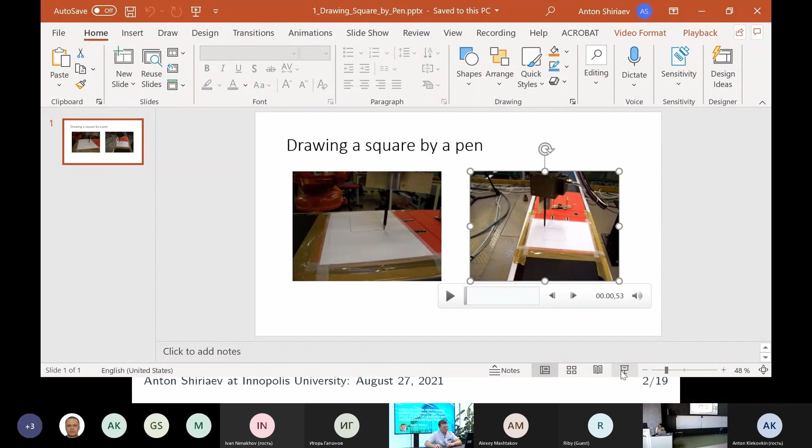I hope you can see my screen, and you will see a movie now, where the robot is expected to perform. Can you see the movie? Yes, everything is okay.

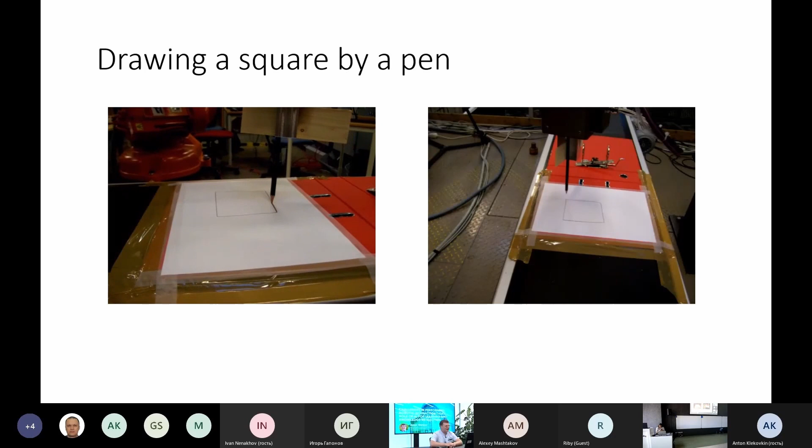Okay, so you see, what is the task? The robot has a pen in its gripping device, and it needs to make a square, and the movie on the right shows that it's feasible. So it means that it's not really a very hard job. However, there are some intriguing parts in the development of that machinery. And if I repeat the same task without specific developments behind this, let's say, manipulation or drawing, and use the standard software of, let's say, this ABB robot, then we will see that a very similar operation becomes a bit hard. So, roughly speaking, the robot using standard software will not be able to perform such a movement immediately.

So even though the task could be easily done by a kid, for quite an advanced and expensive robot it becomes a challenge. So I can repeat it again. And what we see, as a description: the robot has a pen, and the pen, of course, is in contact with the surface, and we can assume that there is a point of contact between the pen and the surface, and suddenly some physics becomes important and drives the pen out, even though, of course, the control of the robot doesn't know what happens with the pen. So in some sense, the behaviors shown on the left and right are done if we assume that the robot has no eye, for example. So it's like feeling just by encoders and possibly a force-torque sensor for the end effector.

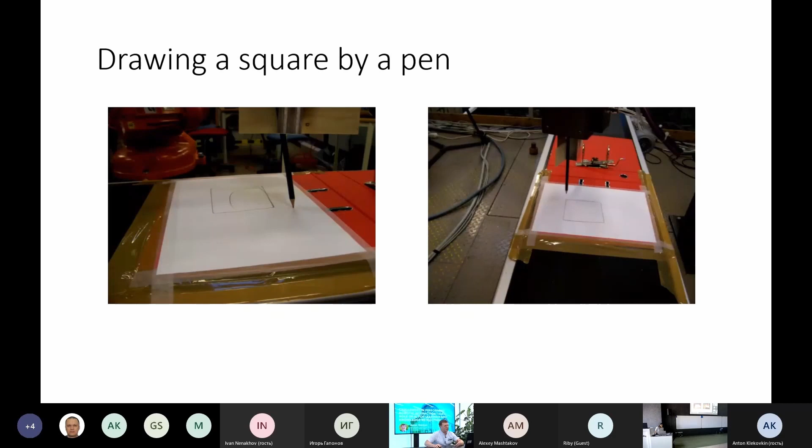Okay, I'm trying to come back to the slides. And this was a motivating example to understand what interaction tasks really are. So we need to perform certain behavior by a robot which will be in contact with the environment. Let's see, okay, just a minute. I need to switch to the slides.

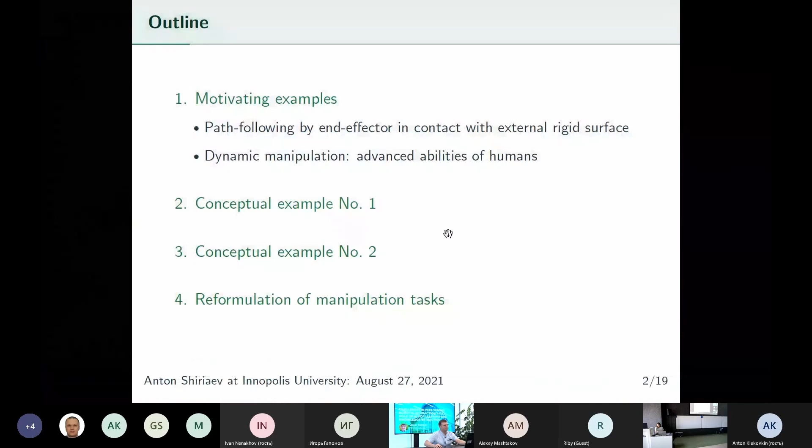Yep. And I will come now to two examples, which I call motivating examples, conceptual examples, which show what could be, let's say, the cutting edge of development in the topic and what kind of challenges appear. And we'll start with the simplest example. You could imagine that we have, let's say, a brick which should slide on a table, and we have another device which we can actuate by some force, move it towards the brick, and we would like to, let's say, touch it and move it. Clearly, in this situation, we have a very similar hypothetical experiment compared to what we have seen in the movie, but the task is a bit different. We would like to move the brick a certain distance, for example, 20 centimeters to the right.

There is plenty of physics involved in that development, and specifically I don't like to discuss in detail contact conditions between this moving stick and the brick I'm going to move. But I will come with simplified dynamics describing the behavior of these two bodies. So assume that they have only one variable to capture their status.

There are also various types of features which I don't like to see, like deformation. Clearly, in the experiment we've seen in a movie, the pen moving on paper which also has some rubber cover below. So there will be certain deformations, and maybe one of those effects really diverts the pen from the path it should go. But anyway, I just try to illustrate here what kind of physics behind might be important.

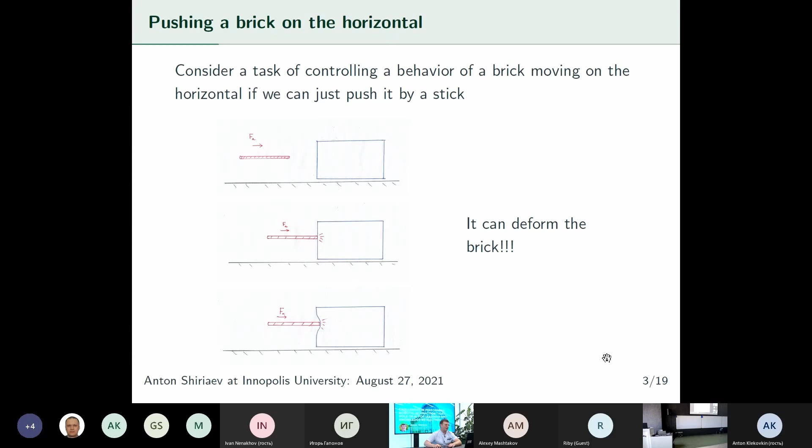In one set of experiments, we did it successfully. In another set of experiments, we deviate from the path immediately. What kind of physics do you need to know to make such an experiment?

Of course, we start with Newton's law. So we assume that we have some object we start to move, which is in red here, and its status is x. We apply external force Fa. Then the dynamics of this object will be mass times acceleration equal to all forces applied, and we assume there is some friction.

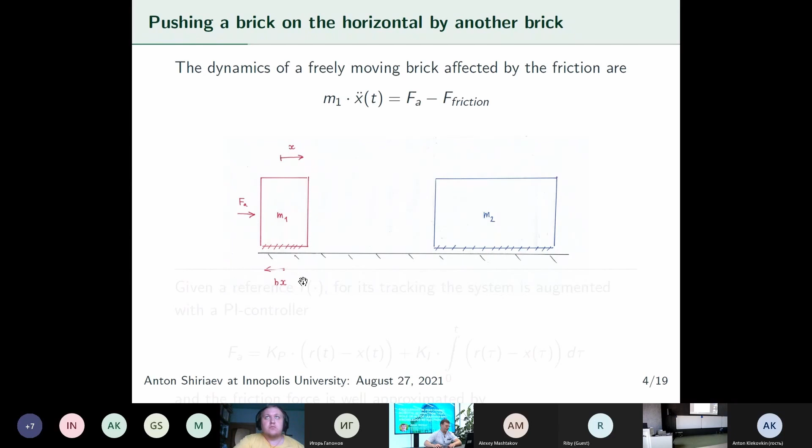We assume that it's linear friction in velocity. And we apply a very standard controller to move this object, let's say a PI controller, where we have a reference R of t, and the first term is proportional, and then the integral part of that feedback. We'd like to make our reference as simple as possible, just constant. Nothing specific important here.

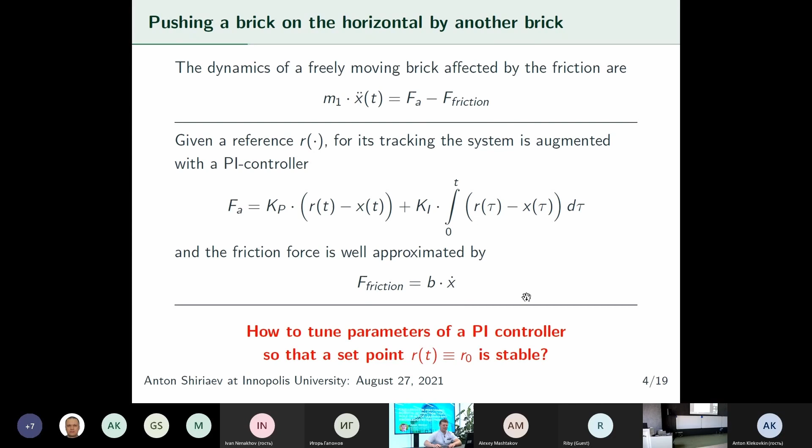If I use such feedback and assume that friction is, as I said, just viscous, depending on the velocity of x, which is the position of the stick I'm going to move, then I get the closed loop dynamics written like that. Clearly, we can think about what kind of parameters Kp, Ki should be assigned so that such a system is stable, meaning our stick will bring its end to the desired position r0.

To do that, we do simple mathematics. For example, I do a Laplace transform of that differential equation and get an equation of third order, where parameters M1, B, Kp, and Ki are now constants.

We know from Routh-Hurwitz conditions that stability of that differential equation is related to the real parts of the eigenvalues of that third order polynomial, and eventually the conditions for that particular polynomial are the following: the coefficients should have the same sign, and since mass is positive, friction B should be positive, Kp and Ki should be positive to be stable, and the product between M1 and Ki should be smaller than the product between B and Kp. This is very basic first year class in control systems.

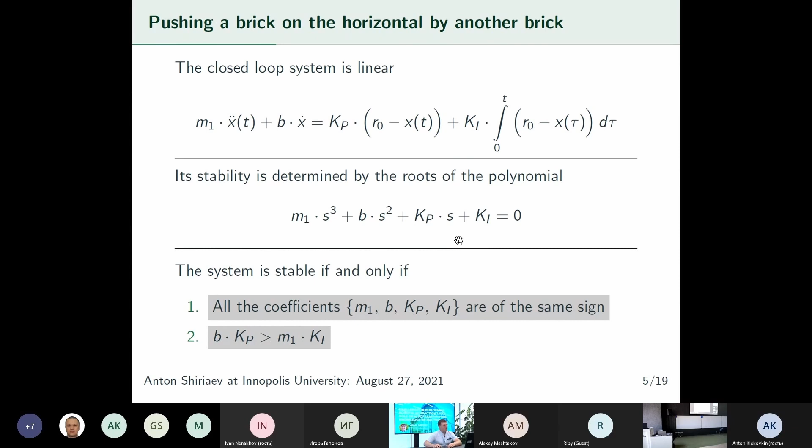However, we will immediately see something which is not typically taught in control classes. What we expect is that at some point the stick we move will touch the brick we are going to move to the particular position. This is our main object. And something should change in the dynamics of our system.

Of course, this object has a certain mass M2. What will be the new dynamics? It will be the same as the previous one, however, we'll have some type of parasitic term related to the additional mass M2 in our system. Roughly speaking, I assume that we have the same variable parameterizing the status, so the difference between the position of this brick and the stick will be just constant, and differentiating, we will get zero twice.

So again, what is written here is Newton's law. If the total system has mass M1 plus M2, but I intentionally move this additional component to the right to see that we have the previous equation plus some perturbation of that equation.

Okay, now let's try to see the status of that system, how it can be stable or unstable. Stability for that system is now changed. Since we have a new parameter M2, which is part of the total mass of the system, the conditions for stability are written as the inequality here: we have a product of B and Kp, compared against a product involving this changed mass. Clearly, we design our Kp and Ki, the parameters of our controller, in a way that guarantees this inequality.

However, it might happen that eventually this property no longer holds. And if I don't know exactly the mass M2, what will happen immediately whenever I touch it, I will get exponential instability. So it's a very strange situation that I design my controller following very basic rules in control theory or in robotics.

Use PI control, typically used for very simplistic, linear systems, and immediately I get some type of black and white results, some type of very hybrid nature. Whenever my stick contacts the big wall, let's say the brick I'm going to move, my controller will result in instability, so the closed loop system will be chattering. Whenever I detach it and come back, then whenever I touch it again, I should come to the regime which will be unstable. And surprisingly, instability will be exponential as well.

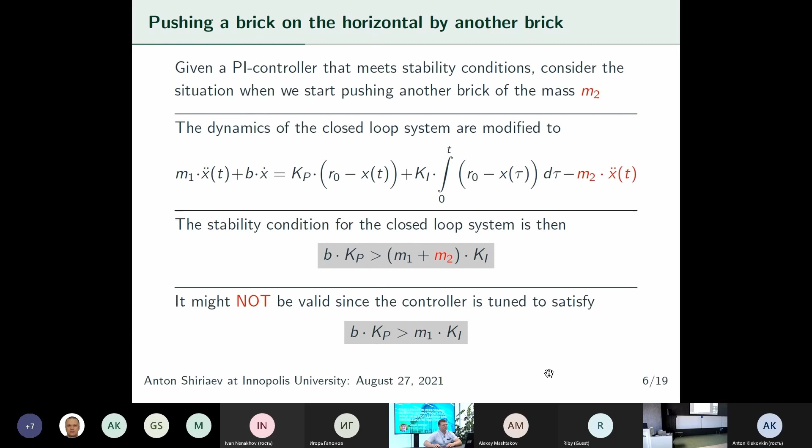Okay, but let's come to some type of mathematics to understand what we could do with that example and how we could handle the choices of parameters of the controller, if we can, such that the system will be in normal condition all the time - not only in the case of free space motion, but also when we are in contact.

And I rewrite the system introducing this additional variable, let's say E, in a format such that it's again an equation of third order - exactly the equation we get after the Laplace transform of this characteristic polynomial. And the right hand side of the equation is either 0 if we have no contact, or this F, this additional force which appears due to the mass of the brick we are going to move.

And I would like to see a bit more than just a mass - it could be another force, it could be some spring effect, it could be more complicated, let's say distributed contact or any other type of physics which might happen there.

But in the case of additional mass, yes. What I forgot to say is that we need to have a picture of what really happens in that example. So we have a plant, let's say the dynamics of our rod, which is going to touch a brick. We design a controller to move it in space, and this is now our closed loop system. So we cannot change anything more.

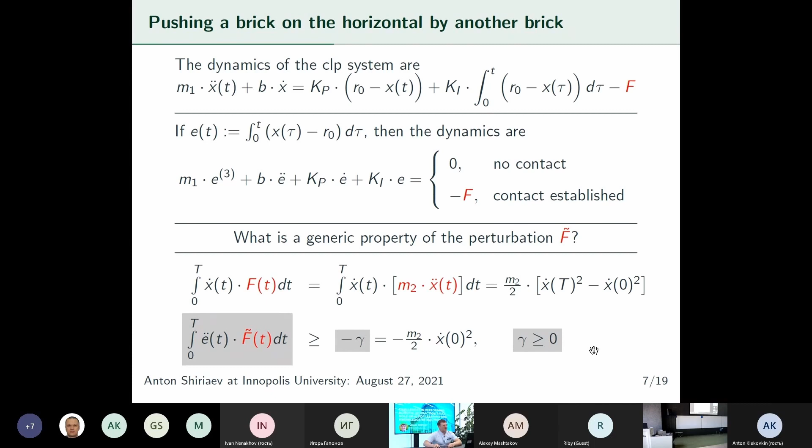And why is this interesting? It's because I would like to make a state space representation of those dynamics to see that the example I'm trying to treat can be put into a more generic format, which is already applied to a much bigger class of systems. So we have a dynamical system, which is linear, originally designed as a stable one - this is, let's say, matrix A of the closed loop system. Then we have a perturbation which comes into a certain channel, and we have a certain function F tilde, which represents our environment, or the presence or absence of contact in this particular example, but in general could be some type of other environmental force.

And what we know about that solution of that linear system and that function f tilde, this is exactly what I said, that I would like to derive this expression like scalar e double dot times f tilde. I rewrite it as, let's say, output of our system, which is now just last component times x, where x is the state of our system.

And it's bigger than minus gamma, where this is what we have seen in the last slide. And this is what I rewrite in more generic form, and then make transposition of that. And I call this internal part of that integral as sigma. This is a quadratic form.

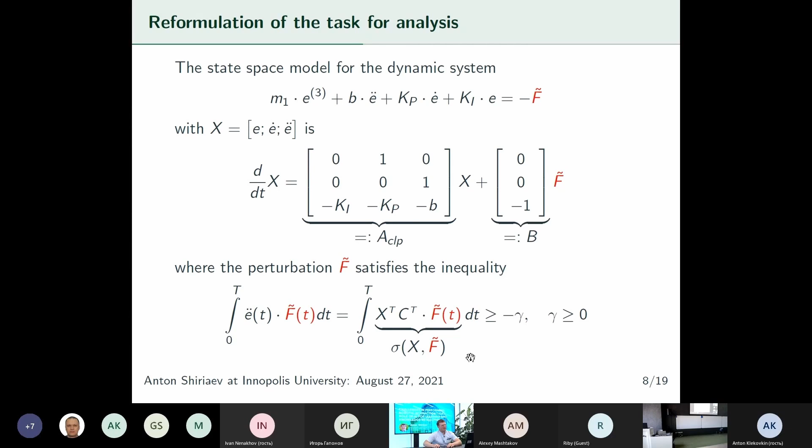A bit further generalization, I would like to see eventually our example in such format that we have a differential equation written in vectorial format when we have a linear stable dynamical system with perturbation, when we have nonlinearity, which comes through this column B into the dynamics of our system, where nonlinearity is characterized by this integral relation, that integral of this quadratic form sigma, which in general, in our case, is just cross product between certain g and x and f tilde, but in general, it could be more generic.

So you see, we would like to represent our closed loop system with perturbation in the format which we can use for analysis. The task now is to understand under what conditions the behavior of that system, of course without perturbation, we know the system is stable and everything goes as we wish, as we designed the controller, it's okay. But whenever perturbation shows up and is bounded and satisfies this integral, typically called an integral quadratic constraint, the solution will still be nearby the original behavior.

This is so-called BIBO stability, bounded input, bounded output stability. This is the simplest stability you could expect, that you cannot guarantee any asymptotic, any orbital, or whatever type of stability, just to stay nearby the original behavior whenever the force is absent. But whenever it's present, we're still nearby the nominal behavior.

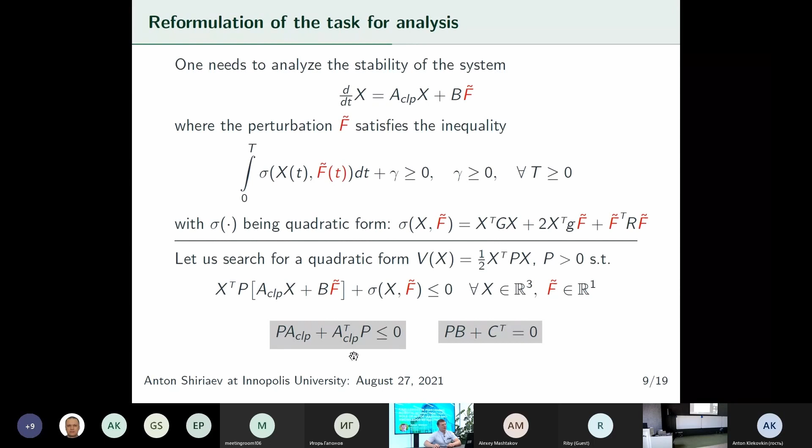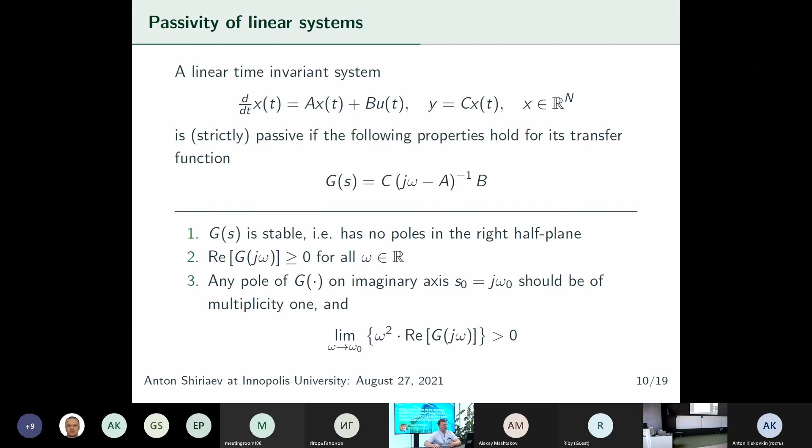I think this is something very standard, but I would like to emphasize that we come immediately from the example to a property which is a very important and basic result in control theory: for our closed loop system to be BIBO stable, both in free space, free movement, and in the interaction task, the transfer function of our system should satisfy this property. And it will immediately guarantee that there exists a Lyapunov function which guarantees this BIBO stability.

Okay, let's come back to our PI controller. Is it possible to check how to tune KP, KI for this case? So the PI controller in Laplace variables is written as follows. And if I check now the transfer function from velocity we have in our system to the force, that's exactly what we need to compute. We get the following expression here.

The interesting thing, not standard in control theory, is that this transfer function will not be proper or strictly proper. You see, we have this term here, which basically means that it's impossible to realize this transfer function. But again, this is not for control design. It's just for analysis of our system in front of various perturbations. And we need to see to what extent this transfer function could correspond to a stable, or passive, dynamical system from this input to that output.

As I said, we need to check that these two properties hold. And it's clearly seen that we have a term here which has multiplicity 2. It means that whenever we have an integral part in the control design, we cannot guarantee any passivity of that dynamical system. And it means that, in our example, there is always a certain brick of big mass such that we will get destabilized behavior, even if we tuned well the free space movement of the stick, when moving a brick using only PI control. So this is an interesting result showing a structural property of the system.

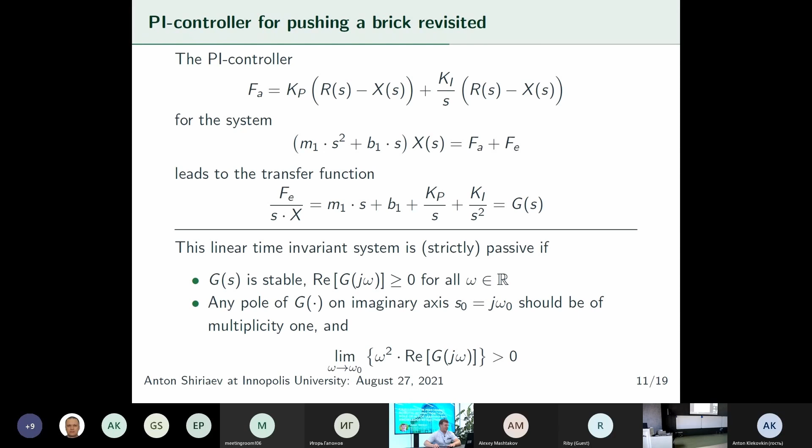So desired position R0. Let's come to the second conceptual example, which allows us to show that the arguments we have here can be extended, but under certain restrictions. Suppose that I have a mechanical system, and it's a fully actuated mechanical system with, let's say, degrees of freedom Q1, Q2, ..., Qn, and let's say it's of so-called natural or simple form; then I have kinetic minus potential energy, the Lagrangian of that system.

And what is well known is that this sum of kinetic and potential energy becomes the total energy of the system, because the system is time invariant. And if I differentiate this function along solutions of that system, I will automatically obtain this passivity relation from input to output. So in the previous example, we tried to search for properties for our closed loop system whenever we have such an input-output passivity relation. Here, for a mechanical system, it's guaranteed; it's given to us.

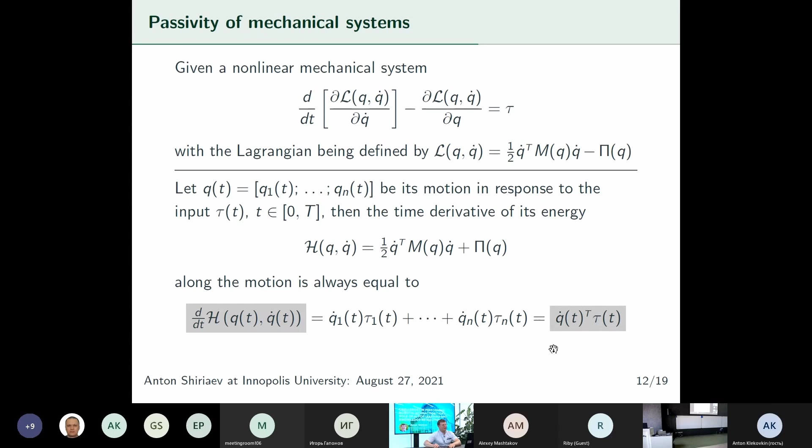Okay, this immediately leads to various, let's say, naive but very powerful arguments. Since a feedback interconnection of passive systems is stable, which is what we tried to implicitly use in the previous example, and since our external object or environment is passive, which we also tried to use in the previous example, the integral of acceleration of x times m2 was exactly the way to verify this property, then we can think about the following control design steps.

Okay, so I have a certain plant, and I would like to design a controller. Of course, the plant in my case is some mechanical system, it's a robot. And I design the controller such that the closed loop system will still be mechanical. In the previous example, with the PI controller, we have a dynamical controller which will have an odd number of states, so it cannot be mechanical in any way. So here I would like to have the structural assumption that the controller will make this closed loop system mechanical, and then I try to exploit this fact for understanding what could be the interaction of that closed loop system with the environment.

If I am able to make this system mechanical, I will have a certain storage function, or internal energy, of that closed loop system, and the environment is assumed to be, again, passive, so the interaction of these two systems will be BIBO stable automatically. And the Lyapunov function shows up for that immediately. And this will be valid for any reference which I can assign, because now it's not about a linear system and stabilization of a particular equilibrium. No, it's now a generic fact. If it's possible, it will be valid for any reference I can choose.

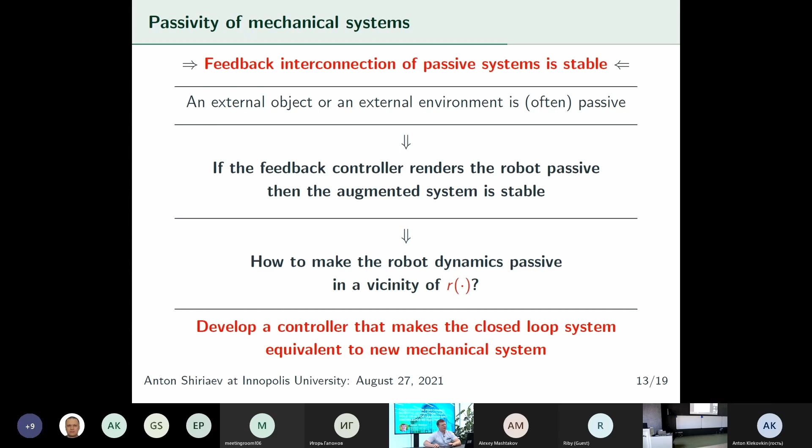So again, to make some type of summary of that example, what we observe is that in case number one, we have a linear system and we come to the equilibrium. Then we could think about a test of passivity and guarantee that our experiment will be stable even if we have these contact conditions. Or we can assume that our system needs to follow any reference and also be stable even with this perturbation due to the contact conditions, but then our controller should make the closed loop system equivalent to a mechanical system, and it immediately implies that it's fully actuated. Of course, there are some examples when it's not the case, but these are classroom case studies.

Okay, these are two interesting questions, but anyway, out of these two questions, we immediately get the main object we need to investigate in this topic. It's called mechanical impedance. It was introduced by Neville Hogan in 1985, so it's 35 years ago. And I think the status of this development is characterized by these two conceptual examples. Of course, there are a number of specific cases where you can use structural properties and various feedback transformation techniques to see how you can reduce one case to another, case number one or case number two. But still, it all comes down to analysis of that mechanical impedance when there is a perturbation in the contact conditions to our closed loop dynamics.

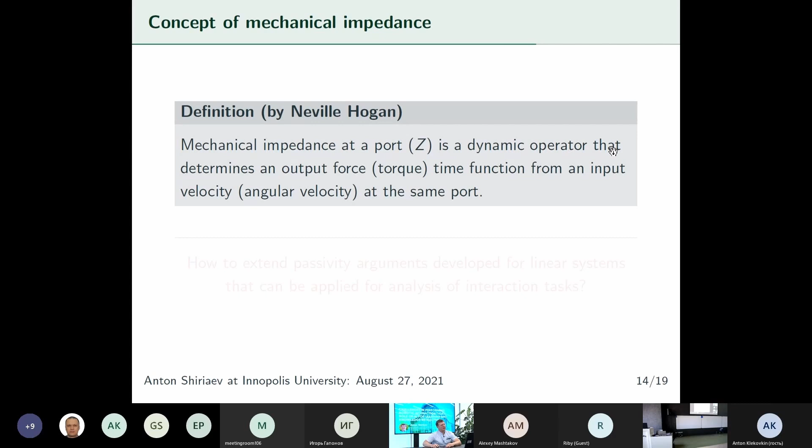And of course, I hope that you have seen this definition before, but what I would like to argue now is that we get in two conceptual examples two different results. We have a very powerful result. Let's say we could design a linear closed loop system with dynamical extensions, whatever we want. However, we need to guarantee some passivity relation, and it's related to the frequency conditions and Lur'e-Riccati solubility conditions, which can be checked very efficiently through analysis of the transfer function.

Or we need to transform the system to a very restricted class of, let's say, mechanical systems, closed loop systems, which also allow us to track any reference without really a problem. But now I would like to come to linear analysis, because in the example I showed you with the pen, it turns out that none of the cases directly apply.

So of course this is part of the experiment, but since we have certain deflection in the contact between the pen and the surface where we draw the square, we get an additional degree of freedom which is not really controlled, because we have no actuator on that degree of freedom. Neither do we just bring the pen to a particular constant position at the end. We follow the square. So it's really agile dynamical behavior.

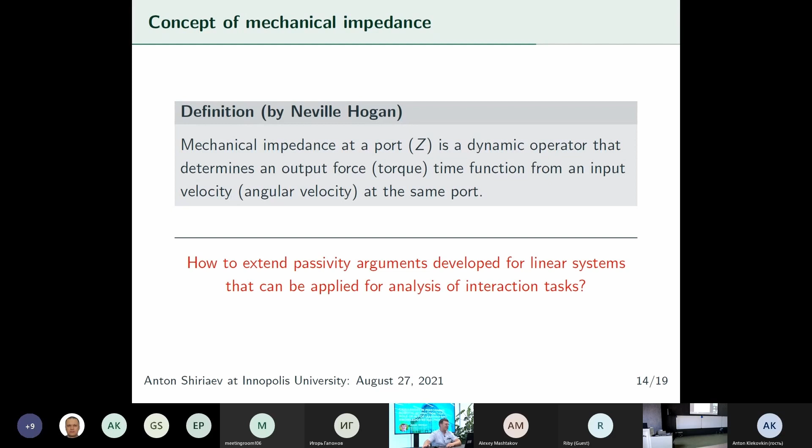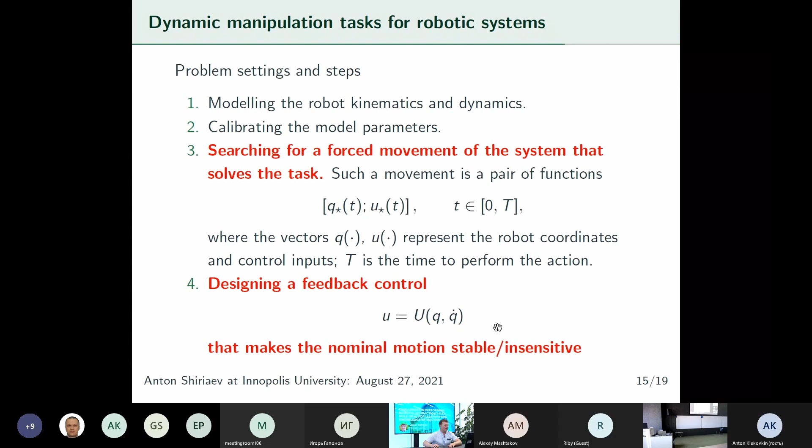And we need to understand after that stabilization how sensitive it is to the contact conditions present whenever we really touch the environment or grasp or manipulate some external object. Okay, and one more justification. Before we come to control design, I said that I will come to a certain type of artificial intelligence technique.

The interesting issue is that for quite many trajectories, to search the trajectories, you can use specific representations. You could of course think about time representation of the trajectories. This could be fine, but quite often you could make different types of representations, which basically describe synchronization functions between degrees of freedom. And what is interesting in this type of representation is that they are parameterized by a finite number of constants, a finite number of parameters.

Let's say I know how one of the functions looks as a function of time. I know only one of them, and plug it into those functions phi 1 to phi n minus 1, and get functions of time for the rest of the degrees of freedom of my system. So it means that to represent behavior, I would need to know only one scalar function and a number of parameters of those synchronization patterns.

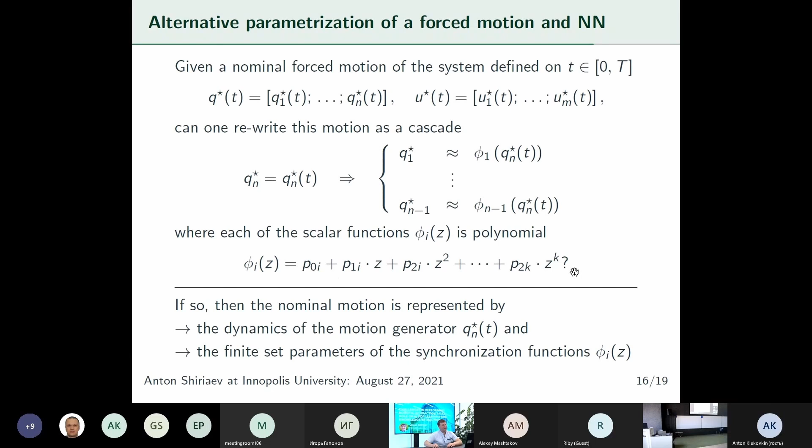This is why I say that calibration of the model and modeling of the system becomes important. But this also can be used for analysis, for example, of behaviors you observe. You observe a human walk, or jump, or do certain behaviors, or open a door. You basically try to search for that representation as a synchronization function between his limbs.

Okay, and then we come to a small technical step in control design: any controller, whenever you apply it to move your mechanical system, or not necessarily a mechanical system, will be decomposed into two parts. One part will be feed-forward, which generates nominal behavior. We assume that we found that nominal behavior. And another part will be feedback.

And these are not uniquely defined operators. For example, you clearly have many feed-forward operators, which are functions of, let's say, the state of your system, such that it will give the nominal behavior, nominal input. So you could have various operators here. However, about feedback, this is the interesting thing, and this is possibly one of the new things for the audience, which I hope will be interesting.

By the way, it means that since we generated the whole nominal behavior just by feed-forward, feedback on nominal behavior is 0. And then it means that the feedback term for controlling agile behaviors will always be a function of transverse coordinates. What are transverse coordinates? A transverse coordinate is a function of system states q, q dot, which is 0 on the trajectory and non-zero outside. You could have quite many transverse coordinates for your system, but typically you could have at most 2n-1 independent.

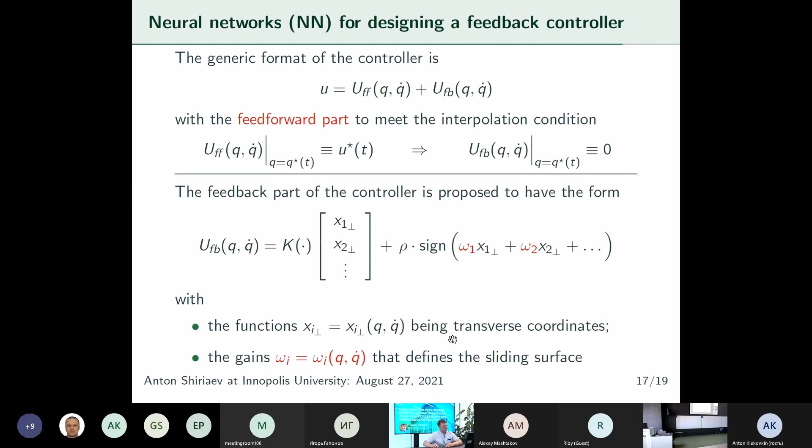And yes, as I said, I have no more time. There is a way of defining parameters of the high gain part, the sliding mode part, also through machine learning methods, even though the method itself is still trial and error. We cannot guarantee for some cases that we easily find it, but it's possible to formulate it as a task and to see that the system starts to search for that representation.

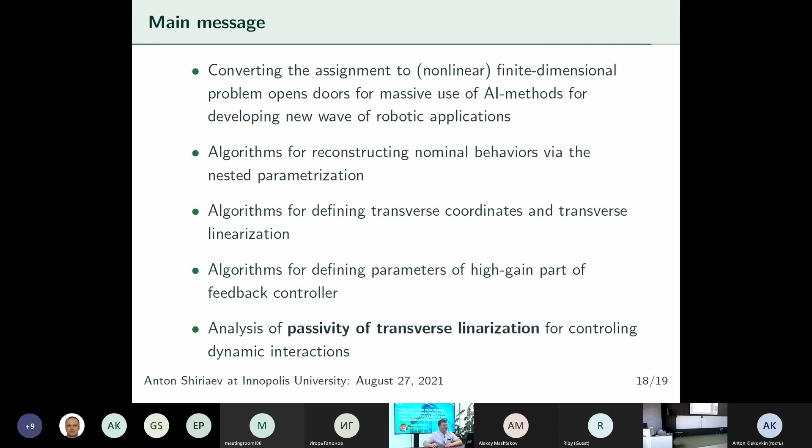But what's most important is that the passivity relation which guarantees BIBO stability, BIBO orbital or BIBO contraction stability for the trajectories of a mechanical system now becomes converted to the passivity of transverse linearization. So it means that we're able to combine arguments both in the first and second conceptual example to show how it might work. Okay, I think I almost conclude the presentation. I have only two messages.

So currently the materials which I presented are now part of the patent application to the Swedish Patent Office made by my colleagues Freydovich and Gusev, Sergei Vladimirovich Gusev. A number of publications will be published. And the EP, we will have it accepted soon, so if you're interested, I will forward it to you. And also, I'm very much interested in experimenting with these results.

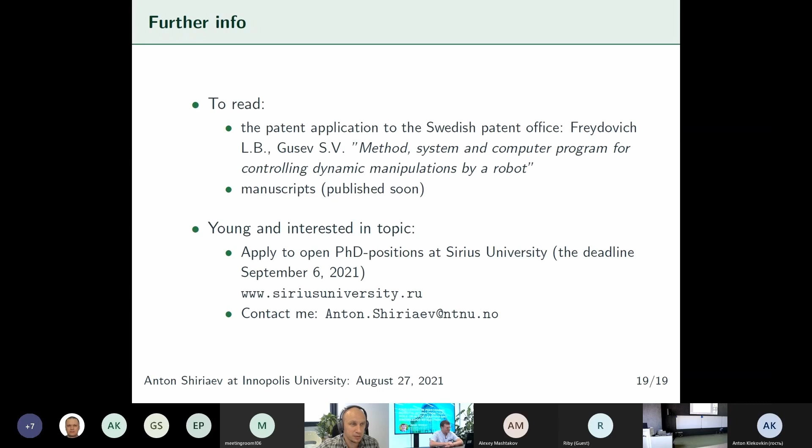So maybe while people are thinking about it, Anton, I have a couple of questions, if you don't mind. If you go a couple slides back to slide 17, in the transverse coordinates you mentioned, right? You need the full state observer for Q and Q dot. Right? No. Mm-hmm. This is the formula brought here. It's a bit provocative because I wrote it in the most simple case.

Of course, if you come to the transverse linearization, then immediately you will see that you come to the area of linear systems. And in the case of linear systems, you could have reduced order observers, you could have full state observers, and so on. So it's not very important at this moment. It's written now like a full state feedback control, but in fact it's not. And in all experiments, of course, we never measure velocities. It's not the case.

But it's also important here to mention that the number of transverse coordinates is not necessary to be minimal. It could be also excessive. So it simplifies a lot of computations eventually. Yeah.